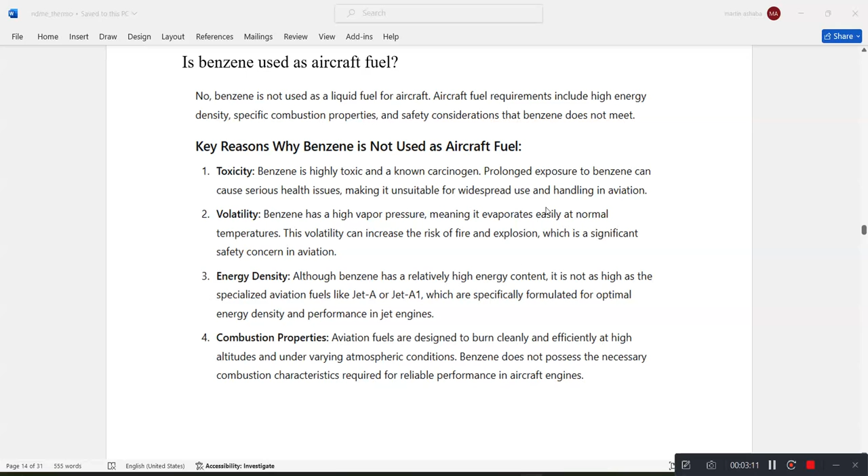The combustion properties: obviously, aviation fuels are designed to burn cleanly and efficiently at high altitudes and under varying atmospheric conditions. Benzene does not possess the necessary combustion characteristics required for reliable performance in aircraft engines.

Now, what are the commonly used aircraft fuels? We have said we have Jet A and Jet A1, and these are kerosene-based fuels widely used in commercial aviation. They have high energy density, good combustion properties, and are less volatile than the benzene we talked about.

Then there is AvGas, that is aviation gasoline, and this is used in piston engine aircraft. AvGas is a high octane fuel designed to provide reliable performance in smaller aircraft. For example, in small helicopters, you'll find that you are able to use this aviation gasoline. Then we have the biofuels.

These are increasingly being developed and tested for use in aviation to reduce environmental impact and reliance on fossil fuels. Now we wanted to tell you that while benzene is a component of some fuels and used in chemical industries, it's not suitable to be used as an aircraft fuel due to its toxicity, volatility, and inadequate performance characteristics compared to specialized aviation fuels such as Jet A and Jet A1.

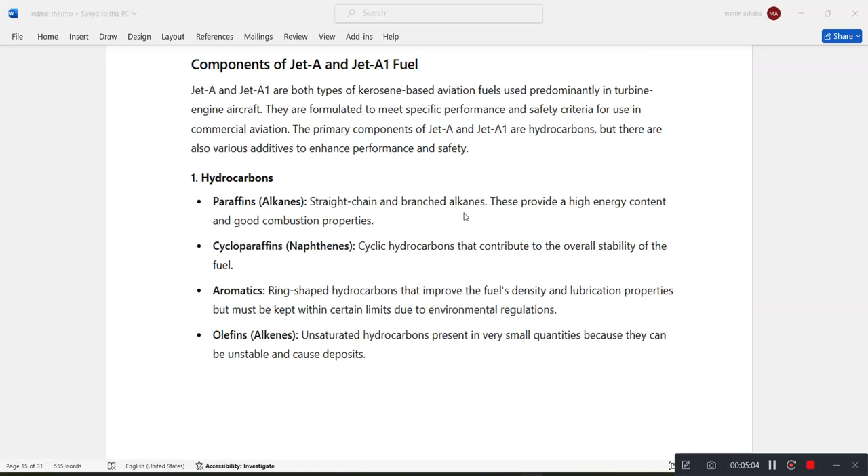Now, what are the components of Jet A and Jet A1 fuel? The primary components are hydrocarbons, but there are also various additives to enhance performance and safety. The hydrocarbons that we are going to talk about are paraffins. Alkanes form the major component of paraffins, and these are straight chain and branched alkanes. These provide high energy content and good combustion properties.

Cycloparaffins, these are cyclic hydrocarbons, the naphthenes, and these contribute to the overall stability of the fuel.

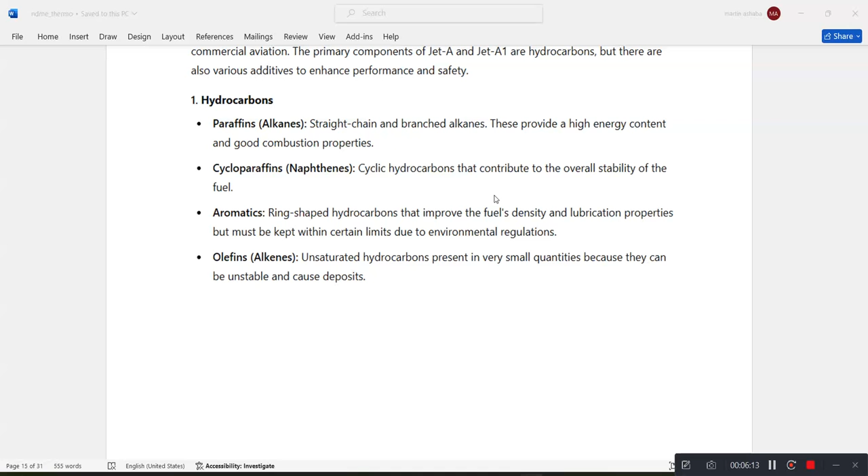The cyclic hydrocarbons contribute to the overall stability of the fuel. And we have also the aromatics, as we have already said, these are the ring-shaped hydrocarbons that improve fuel's density and lubrication properties, but must be kept within certain limits due to environmental regulations. The olefins, these are the alkenes. These are the unsaturated hydrocarbons, as we had earlier presented in one of our videos, and they are present in small quantities because they can be unstable and cause deposits.

What are the other additives that we add onto Jet-A and Jet-A1 so that they perform better or we enhance their performance? We have the antioxidants. These prevent the formation of gum and other oxidation products that can clog fuel systems. We have also antistatic agents. These reduce the risk of static electricity buildup, which can be hazardous during refueling. Of course, the presence of this static electricity can cause sparks, and these sparks can later on germinate into dangerous and hazardous explosions that might take life and destroy property.

Then you also need to have corrosion inhibitors. These are also additives that protect the fuel system components from corrosion. A basic example is what you always put in the coolant system for the engine. Of course, you always have these internal combustion engines. When you add the coolant, there is this specialized substance. If you add water, you find you have to add another coolant. And the major purpose also of the coolants is to inhibit corrosion. Otherwise, the engine might deteriorate with time and reduce its lifespan.

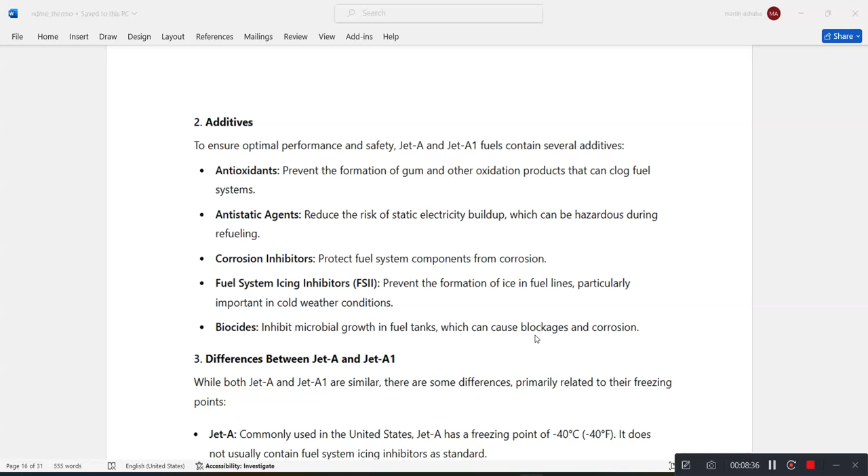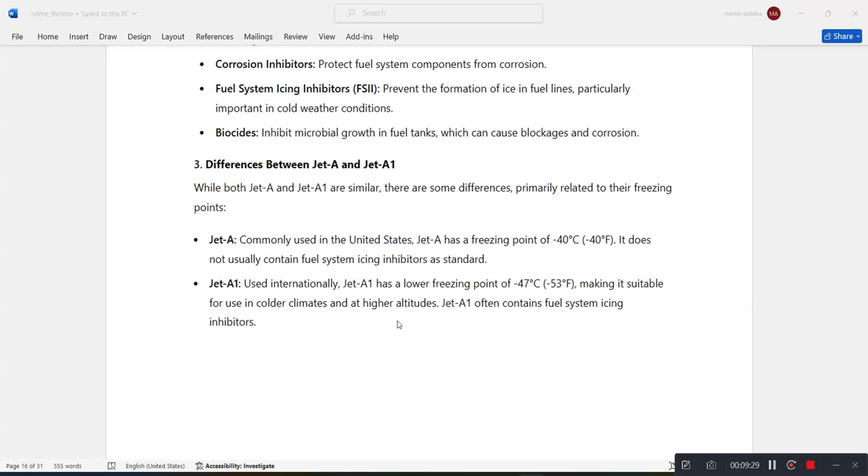So now we want to also talk about the difference between Jet-A and Jet-A1. While both Jet-A1 and Jet-A are similar, there are some differences primarily related to their freezing points. The Jet-A are commonly used in the United States. Jet-A has a freezing point of negative 40 degrees Celsius, and it does not usually contain fuel system icing inhibitors as standard. So for it, you just use it the way it is, and you may not need to put this FSII. What about the Jet-A1? They are internationally used, and they have a lower freezing point, making it suitable for use in colder climates and at high altitudes. Jet-A1 often contains fuel system icing inhibitors.

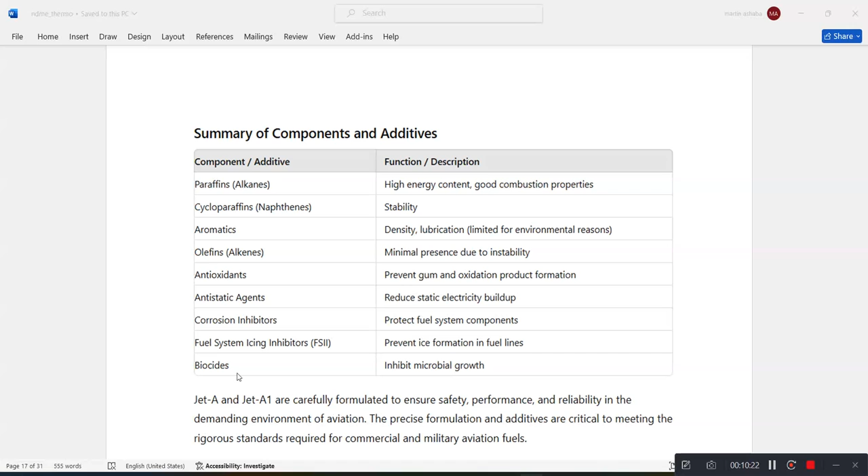So let us look at the summary of these components and the additives that we put in the aircraft fuels. We have the paraffins, which are the alkanes. Then naphthenes, those are the cycloparaffins, the aromatics, olefins, the alkenes, antioxidants, anti-static agents, which reduce static electricity buildup, the corrosion inhibitors, which protect the fuel system components from corrosion and thereby breaking away with time. Then the fuel system icing inhibitors to prevent the formation of ice, the biocides that prevent the growth of microbacteria or micro living organisms.

Now, members, let us also talk about the common fuels, and these common fuels include diesel, petrol, and gasoline.